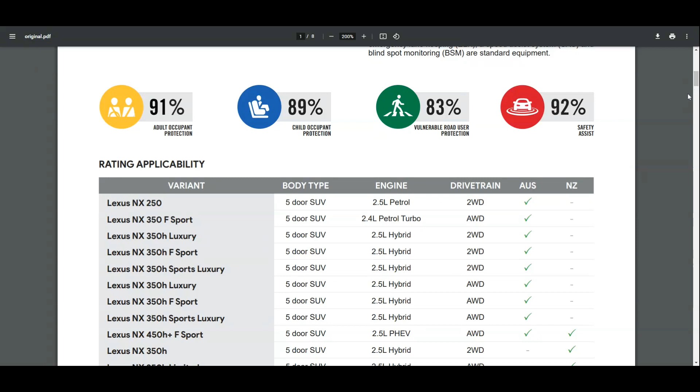So we're going to look at the NX report, and I'm going to go through this process and just point out a few things. I'll be providing a link to the PDF so that if you're interested, you can go through it yourself. This actually applies to all the models available in Australia, and New Zealand only has the 450h+ F Sport, the 350h, and the 350h Limited.

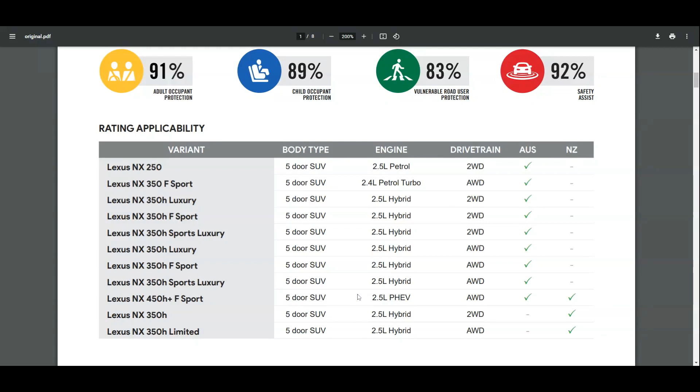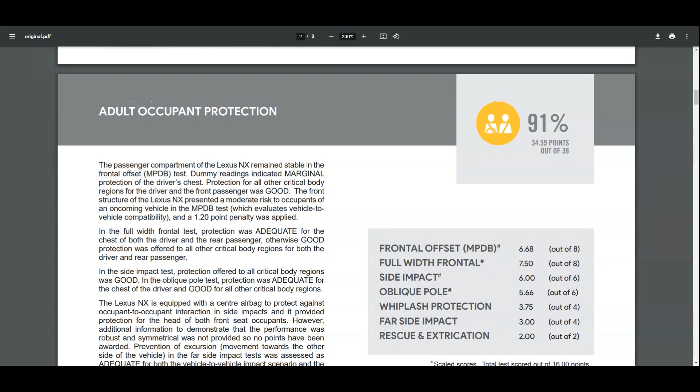In this report, the adult occupant protection got 91%. I think the biggest concern here is this line where the dummy readings indicate marginal protection for the driver's chest. Other than that, everything seems to be okay.

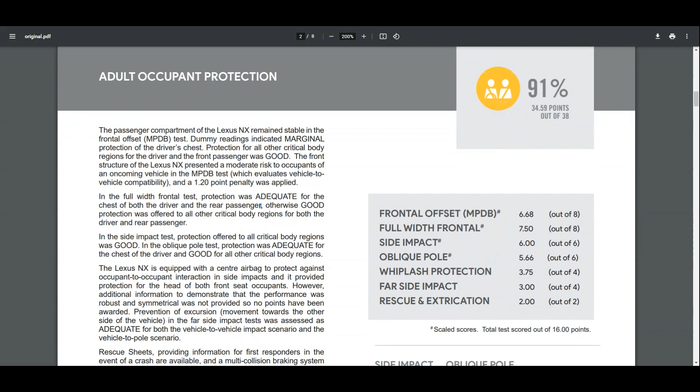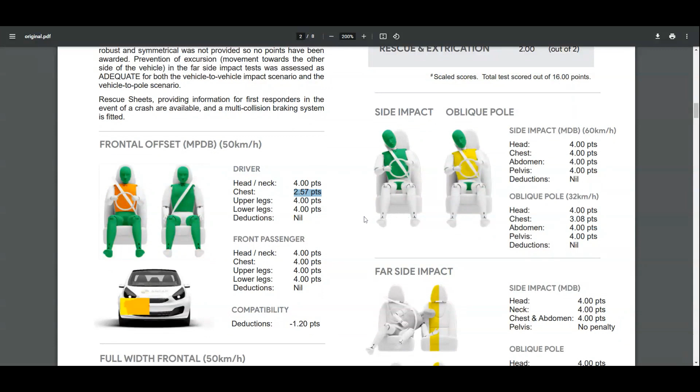They've made a pass. In the frontal offset, the driver chest only got 2.57 points out of 4 points. And in the crash, there was some deduction of 1.2 points in the front.

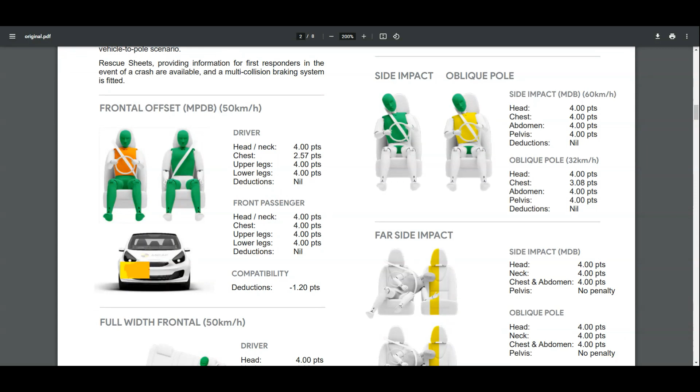Driver side, on the side impact, everything was good. And in the oblique pole, we also got an adequate on the chest, which is 3.08 points. And when we look at the far side impact, everything went well.

There's nothing deducted there. And in the full width frontal, again the chest seems to be the one that doesn't give you the full points. The driver got 3.06 and the rear passenger got 3.72.

In the NX, there is a center airbag that protects you between occupant to occupant, but it looks like they are not giving points because they weren't able to test certain things on the occupant-to-occupant protection. Other than that, I think for the rear passenger rear impact, they deducted 0.25 points.

In Australia, they do have the advanced e-call, and in New Zealand they do not. So I'm assuming this was not included, and they just gave the 1 point.

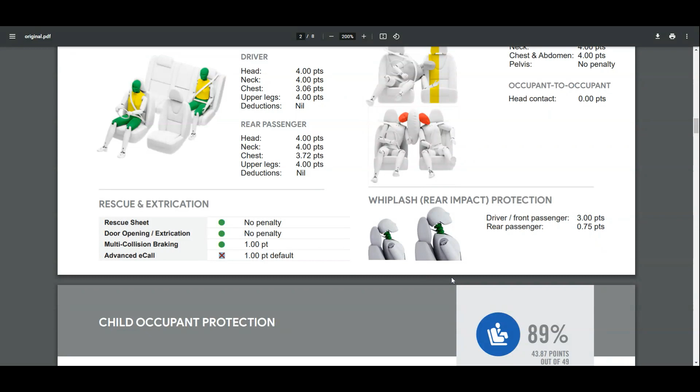So in the child occupant protection, let's look at this - 89%. The biggest downfall here is the onboard safety features, which only got 8 out of 13, and the front test is 15.87 out of 16, which is very close to perfect.

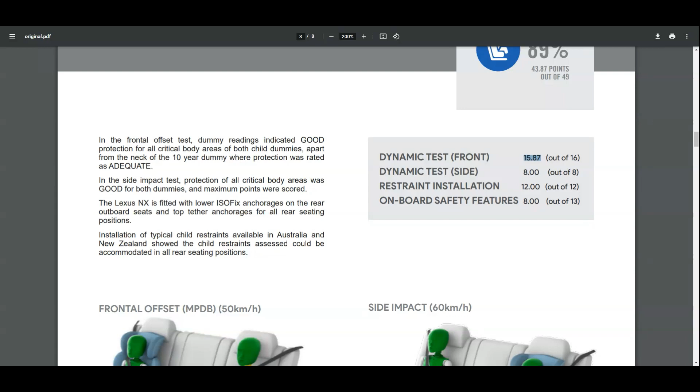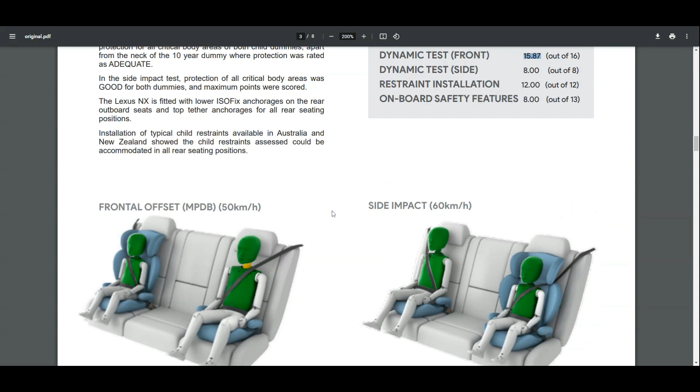Let's have a look here. The front offset - the deduction was on the 10-year-old, where we had adequate on the neck area for a 10-year-old.

The side impact, everything is green, which means good. The onboard safety is where the deductions are made. The integrated child restraints on the second outboard and the center were not available, and the ISOFIX on the center was also not available. So that's probably where the most deductions were made.

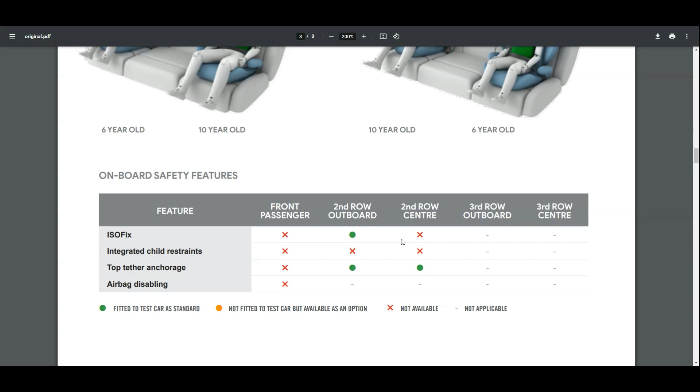The cyclist got a 0.27 deduction, and also the AEB pedestrian backover did not get any points. It does say that the bonnet of the Lexus NX provided good or adequate protection to the head overall on the surface, but it got marginal and poor results recorded at the base of the windshield and the windshield pillars.

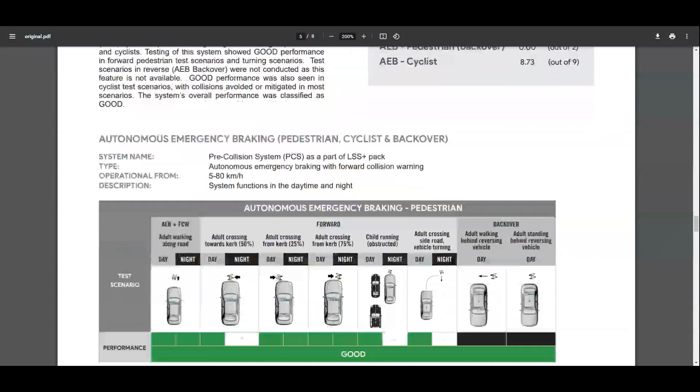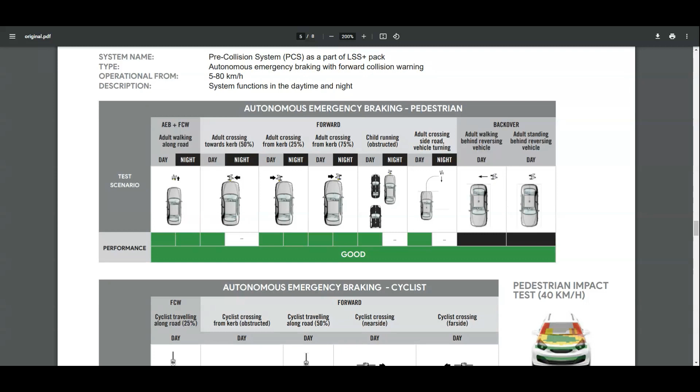Let's scroll down a little more and have a look. Overall here, you see the autonomous emergency braking - everything is good other than the backover, which I'm surprised by. I don't know if it's the limited features in the NX in Australia and New Zealand, but I thought we do have some emergency braking on the back too.

Also for cyclists going front, all good - the performance is very good. And here's really more of the biggest impact, where we have poor results in the pedestrian impact at 40 kilometers per hour.

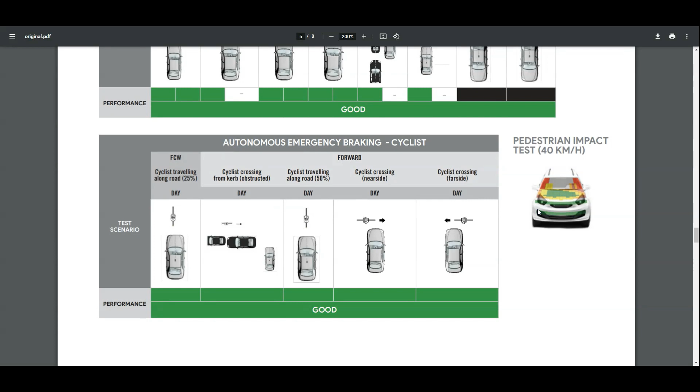Now we scroll down to the safety assist, 92%, 14.7 points out of 16. So where did we get the deductions? The speed assistance system was 0.5 out, the lane support systems got 0.5 out, the car-to-car got 0.25 out, and those are the areas where some deductions were made.

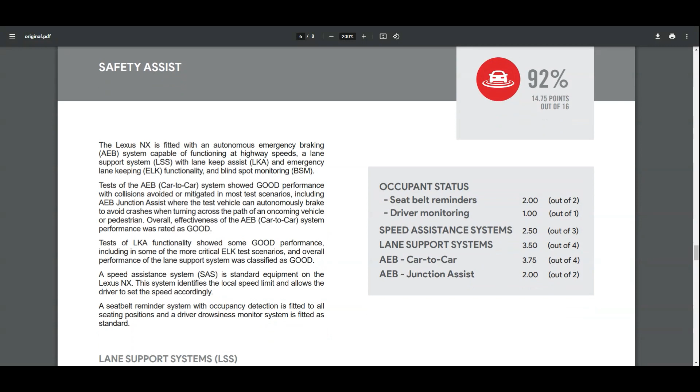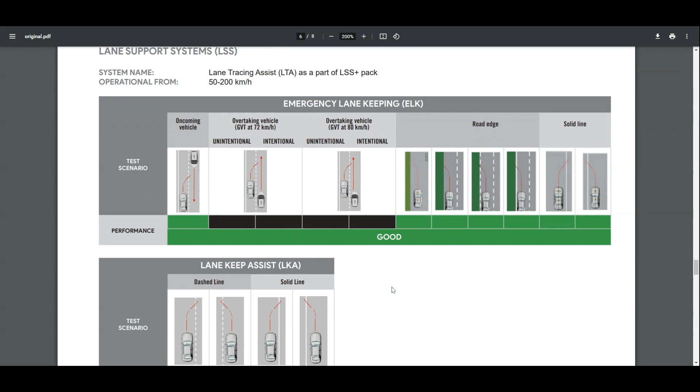Scrolling down, we can see the overtaking was not tested, but everything else was good when tested. That was the emergency lane keeping. Now the lane keep assists, they're all good with dash lines and solid line tests. The lane departure warning and the blind spot warning all passed.

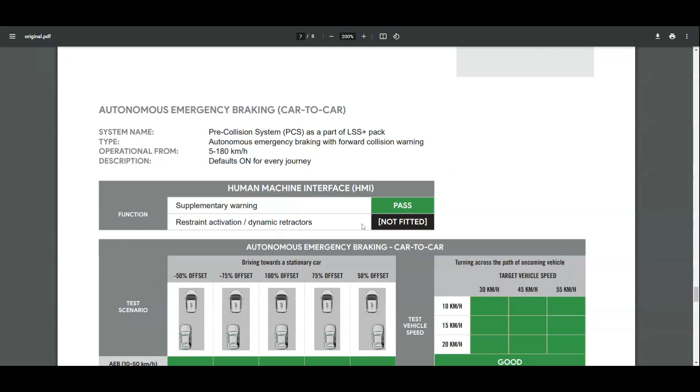Now looking at the human machine interface, the supplementary warning was a pass. The restraint activation dynamic retractors - we did not have that feature, so that was not tested.

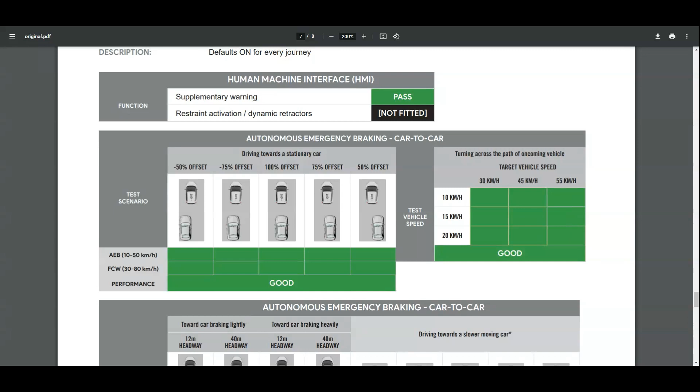Now we're looking at the autonomous emergency braking, car to car. Everything went well, the car was able to stop. And here, autonomous emergency car to car, another set of testing, and everything got a pass and is all good.

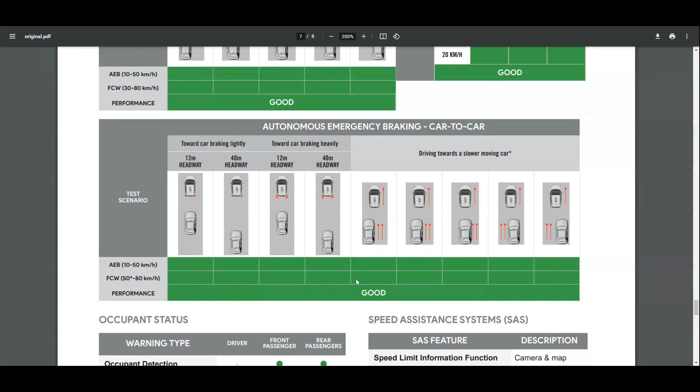So then here the occupant status. The driver has a visual and an audible, and a driver monitoring. Front passenger had all the warnings, and the rear passengers also had the warnings.

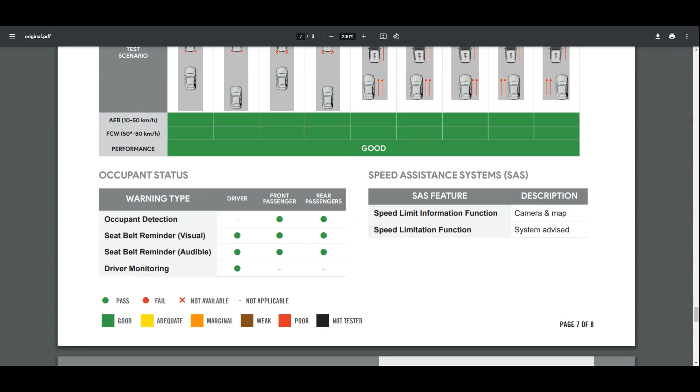Then the speed assistance systems - speed limit information, camera and map, and the speed limitation function is system advised. So I guess that's just some information there.

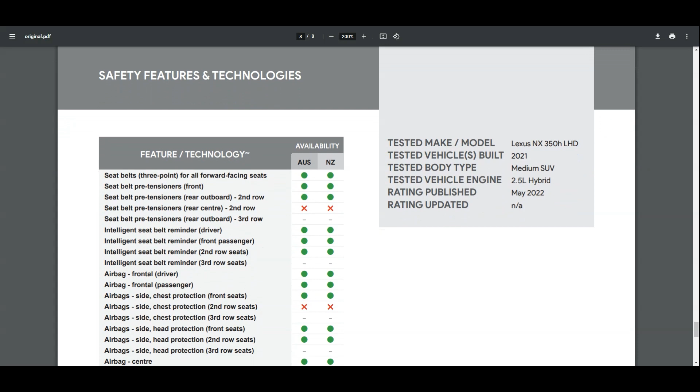Now we look at the technologies and safety features available in Australia and New Zealand. You can see here it's like for like, except in Australia they do have the e-call, the emergency calling, where in New Zealand that feature is not available. Other than that, they're all the same settings.